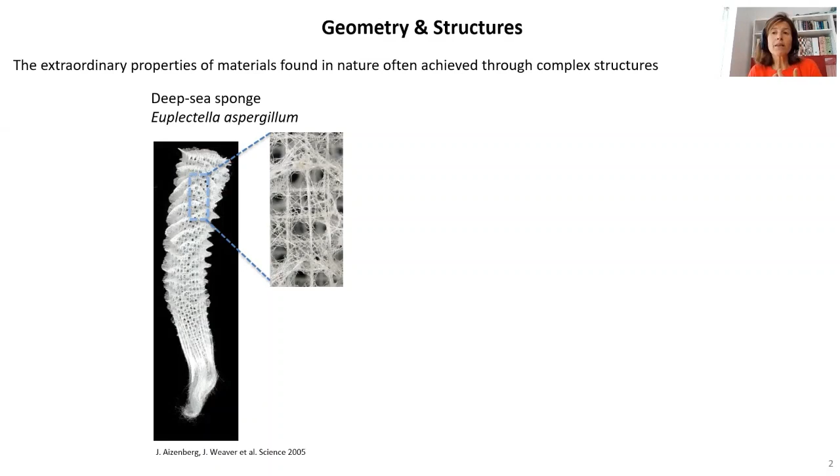For millions of years, nature has used structure to achieve new, unusual, extraordinary properties. Think of the sponge: structures, microstructures, have been demonstrated to provide robustness. Structure has also been used by nature to create colors, as well as to enable adhesion.

But clearly, structures are not only buildings, not only bridges. Structure is everywhere, surrounding us at different scales. An umbrella is an example of a deployable structure, but we have also designed structures to absorb and direct sound.

We use structure for packaging to protect objects, as well as to direct light. And this clearly is a photonic structure that in this case is at the micrometer scale.

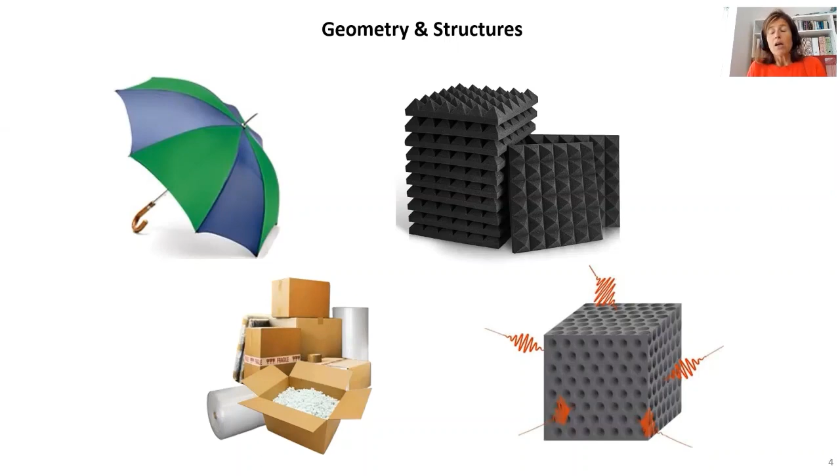In my group, we are very excited about structures. What we do is combine theoretical, experimental, and computational methods to design highly deformable structures, and we try to take advantage of deformation to achieve new modes of functionality. Here you can see some examples.

We have been using instability to design materials with unusual properties, such as negative Poisson ratio, to design energy absorbing materials, as well as actuators. We have also been using origami principles to design reconfigurable structures, as well as bistable mechanisms. We have been studying propagation of mechanical signals through these nonlinear systems.

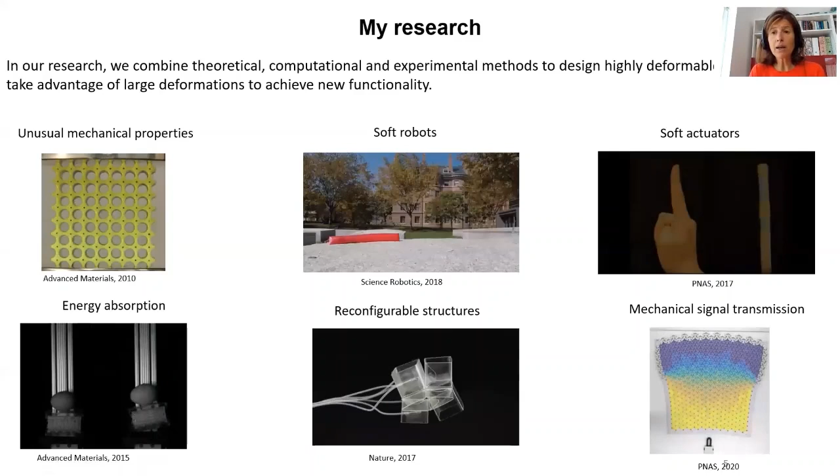Today I want to focus on a special class of structure, and these are multistable structures. The structures I'm going to talk about are elastic structures, made of elastic material.

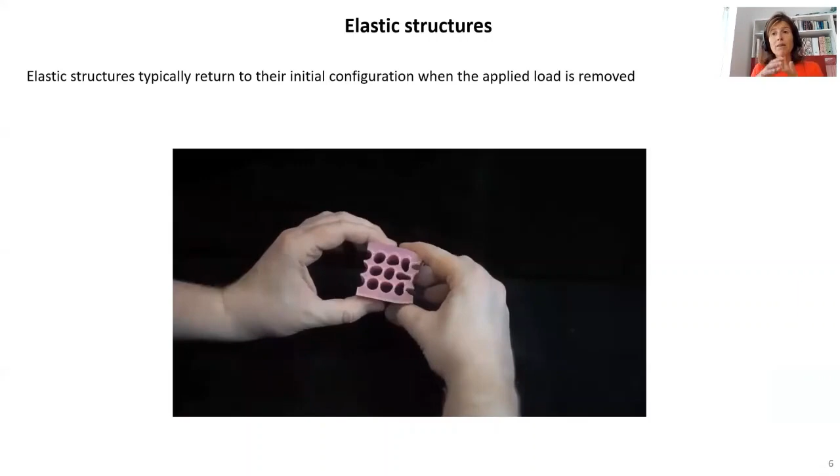Typically when we take an elastic structure, like the one you can see here made of rubber, we compress it, it deforms, it might undergo substantial deformation, but as soon as we release the load, it goes back to the initial configuration. This is because the force displacement curve may be highly nonlinear, but the potential energy, the energy landscape, is characterized by a single minimum.

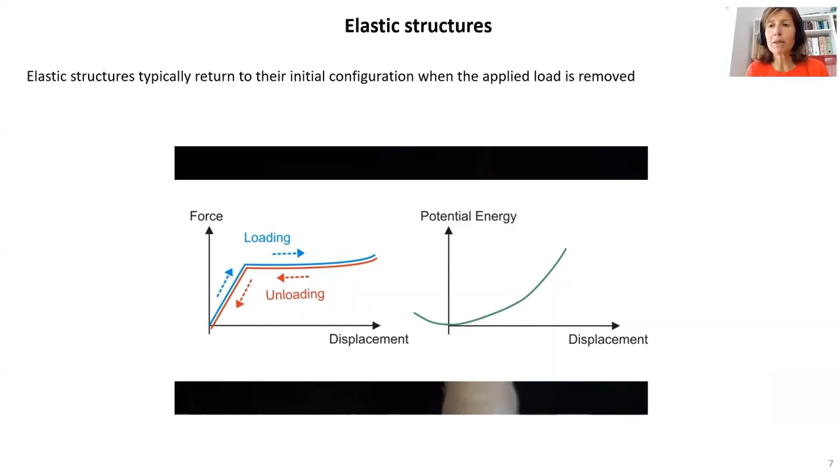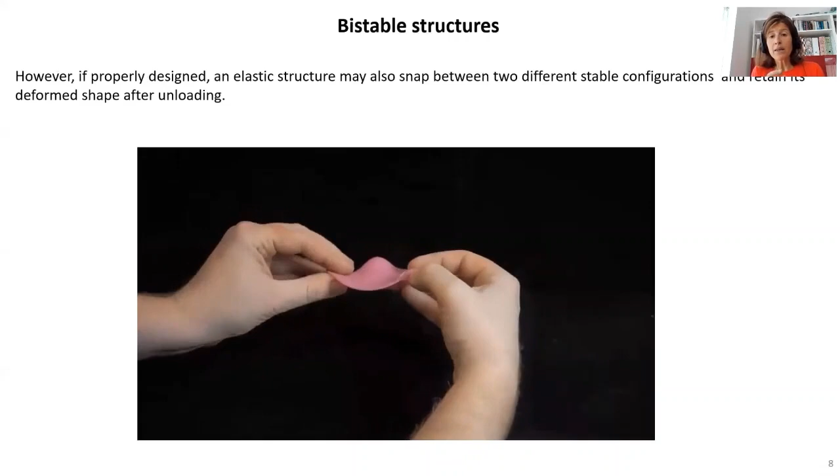However, we also have known for a long time that we can design an elastic structure to have two stable configurations. These are the so-called bistable structures. Here you can see an example: a thin shell given the shape of a dome. Now you can see that we push it down, but as soon as the finger gets away, it doesn't go back to the initial configuration, but it retains its inverted shape.

Why is this? Well, because the energy of the structure is characterized by two minima: one that corresponds to the undeformed configuration, and one that corresponds to a stable deformed configuration. For many years, the mechanics community has studied how to identify and realize shapes leading elastic structures to bistability, to multistability.

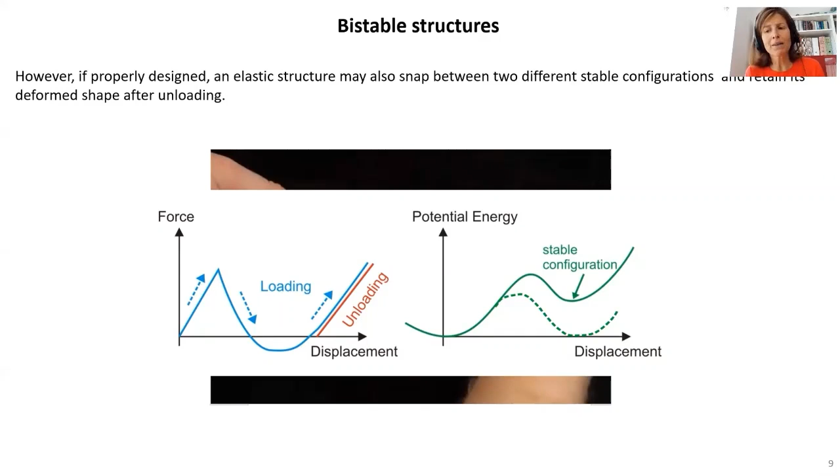But in recent years, a new trend has also emerged. Specifically, multistable structures have emerged as a powerful platform to design, to engineer new functionality and to design smart structures.

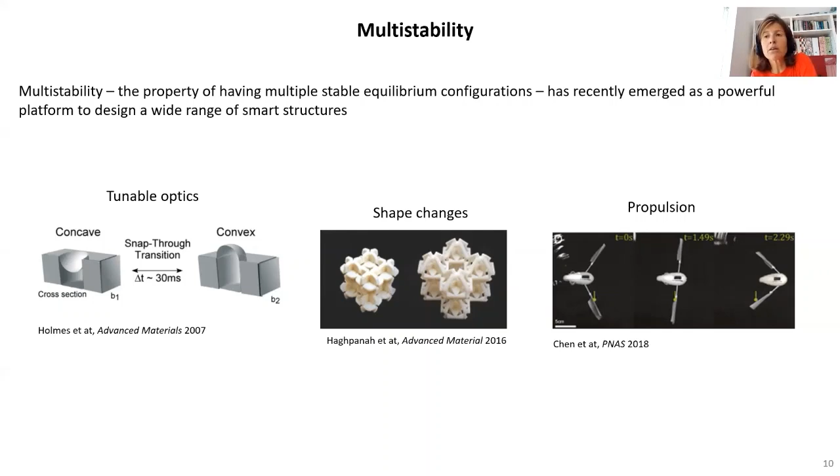My group in recent years has been thinking about these lines. Today, specifically, I want to talk about 2 specific projects.

In the first project, we'll see how bistability can be exploited to design large-scale inflatable origami structures and deployable origami structures. In the second part, instead, we look at the behavior of arrays of bistable structures, and we'll see how these also provide an opportunity for robotic systems.

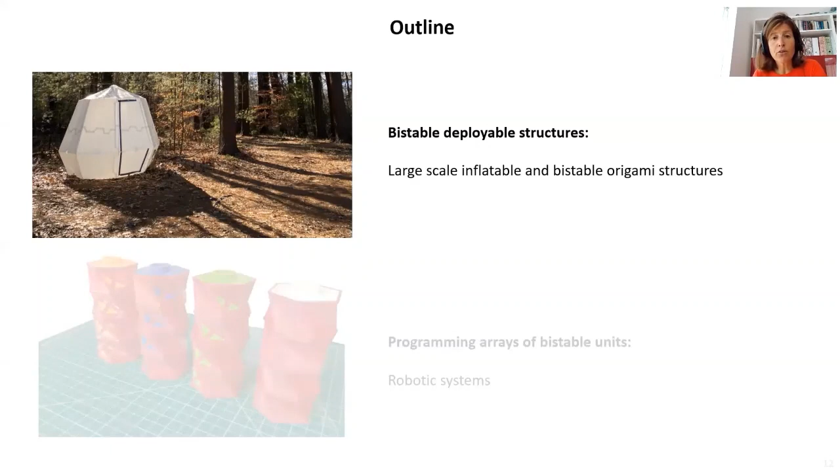All right, so let's start focusing on the first project on bistable deployable structures.

Here, our goal is to design deployable structures. What are deployable structures? These are structures that have a compact state that is ideal for transportation and storage, and an expanded state that is used for functionality. Here you can see an example of a linkage-based deployable dome.

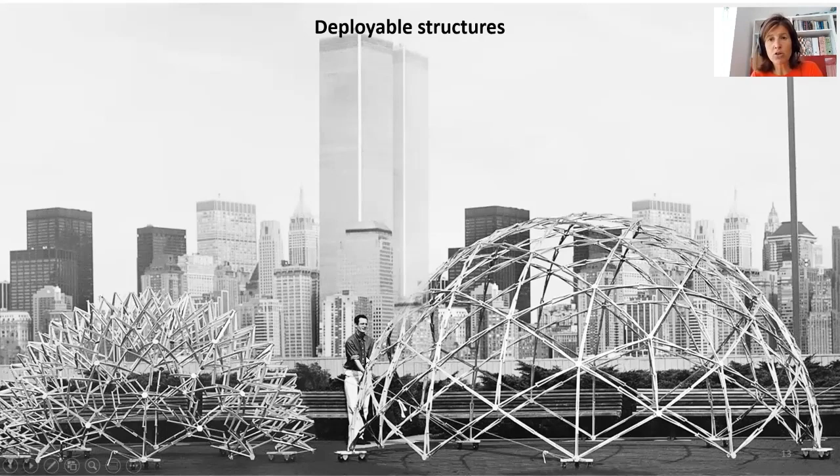The guy here that you can see is Chuck Hoberman, and the project I'm going to present is work in collaboration. It was led by my postdoc Ben, my student David, and it's a collaboration with Chuck Hoberman.

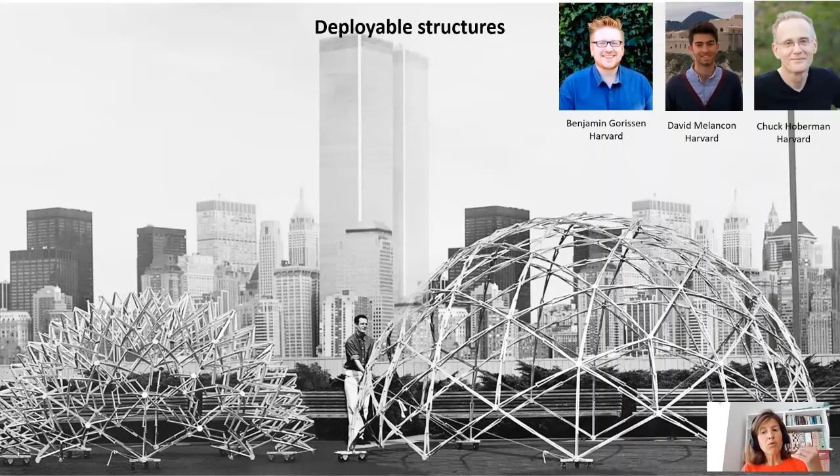Now, if you think about a deployable structure, there are a number of features that we would like them to satisfy. First of all, we want them to occupy the minimum space when they're folded. We want them to provide a robust shell, a protective environment when they are deployed. We want them to lock in place after deployment. We want them to retain the deployed shape. And finally, we want them to be as easy as possible to deploy.

So keeping in mind these requirements, we started looking for solutions that satisfy them. Clearly, there are solutions out there, and one you can see here, for example, linkage-based structures, but they don't satisfy all these requirements. For example, for linkage-based structures, in order to provide a robust shell, you need to have a cover that typically is a separate component that you add on. And further, to lock them in place after deployment, typically you need to add additional components.

So we started thinking about a platform that enables us to satisfy all these requirements. Origami came to our mind as a promising platform. Why is origami promising?

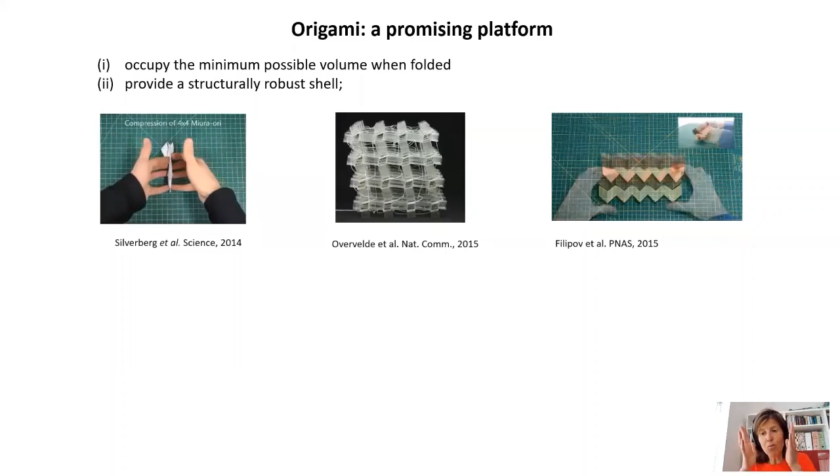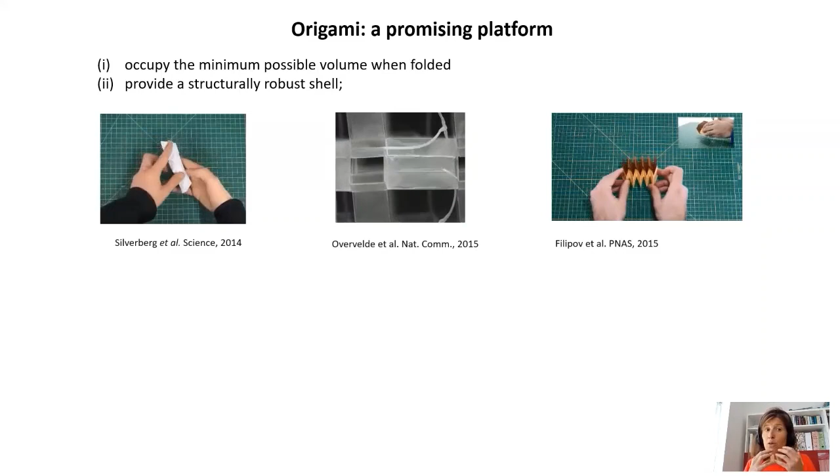Well, first of all, these are structures that can go from a very compact configuration to an expanded configuration, as you can see in these movies playing here.

Second, they naturally provide a robust shell because of integrated faces and hinges. Further, it has been shown that by carefully designing the folding pattern, they can be made bistable, having multiple stable configurations. We envision this feature can be exploited to lock our structure in place after deployment. So all this is good, but how about easy deployment?

The deployment of origami is not typically so easy, as you can see in this movie at the center of the top row. Typically, in order to deploy them, you need to control individual hinges, and this makes the actuation quite a complex process.

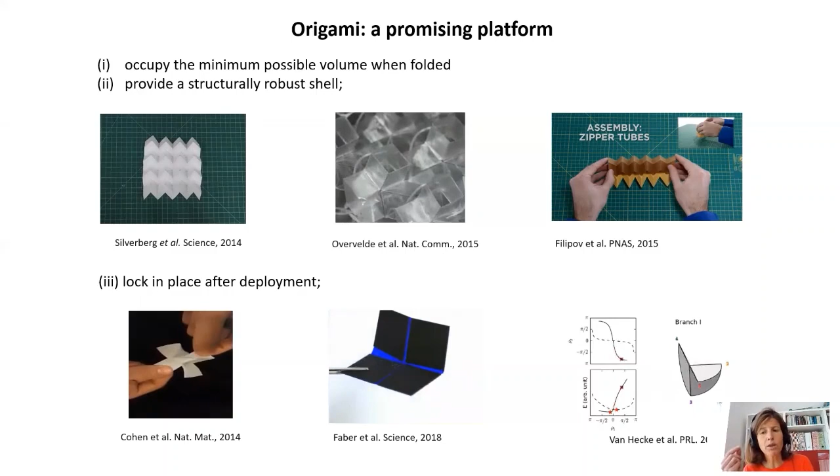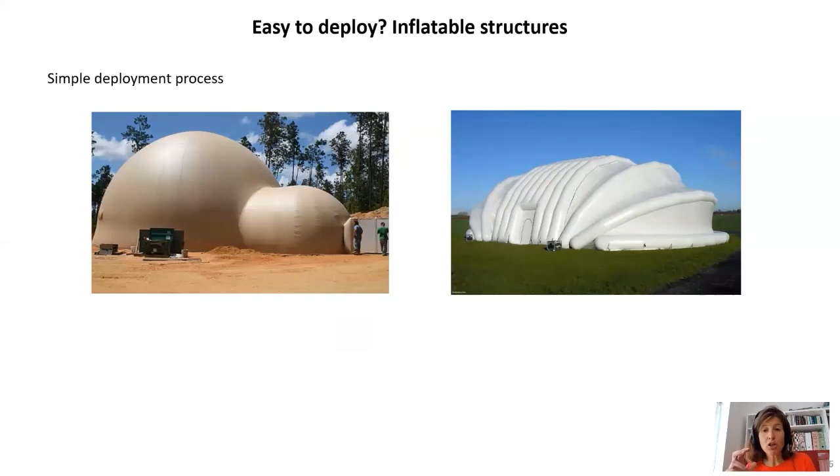To overcome these challenges, we thought about inflatable structures. We use inflatability because inflatable structures are very easy to deploy. All you need to do is provide an input pressure and then automatically they deploy.

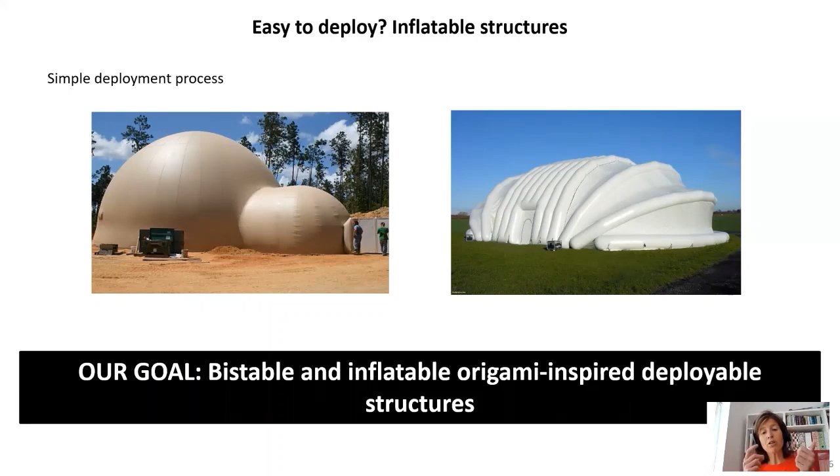So then our question is: can we use origami principles to design deployable structures that are bistable and inflatable?

So what is our platform? Our building block is extremely simple: a triangle ABC, with alpha and beta as the internal angles. To deploy this triangle, we rotate it around the edge BC.

Here is a very simple and important property at the base of our concept. If we choose the internal angle beta to lie within certain limits, at a certain point during deployment vertex A will intersect again the circle circumscribed to the initial flat configuration. Why is this important? This means that the angle alpha is recovering the projected XY plane.

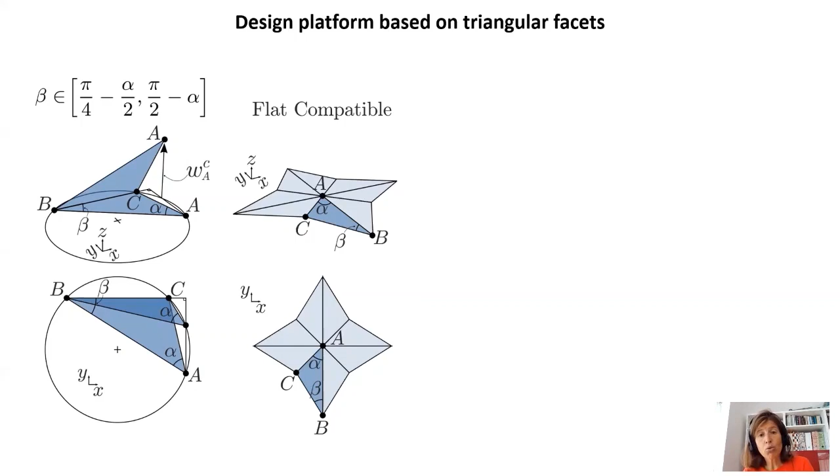Remarkably, this simple property gives us the opportunity to realize closed origami structures with at least two stable configurations. We can take a triangle and tessellate it to form a closed structure. We know that this triangle recovers the angle alpha at a certain point, at a certain level of deployment.

So it means that this structure also has another geometrically compatible state that is expanded—a deploy-compatible state. Now you might ask, what's in between? Well, all configurations in between are going to be geometrically incompatible.

Here the incompatibility is highlighted in red. It means that the faces are either going to separate or compenetrate. We can geometrically quantify this incompatibility, and I denote this geometric incompatibility by delta ABC.

So the idea is these simple geometric properties provide opportunities for bistability. When we make this structure out of elastic material, the flexibility intrinsic to the structure will absorb this geometric incompatibility.

The idea is this structure will have two stable configurations corresponding to the compatible states: the flat compatible and the deploy compatible states. These two states are separated by an energy barrier generated by the deformation caused by this geometric incompatibility.

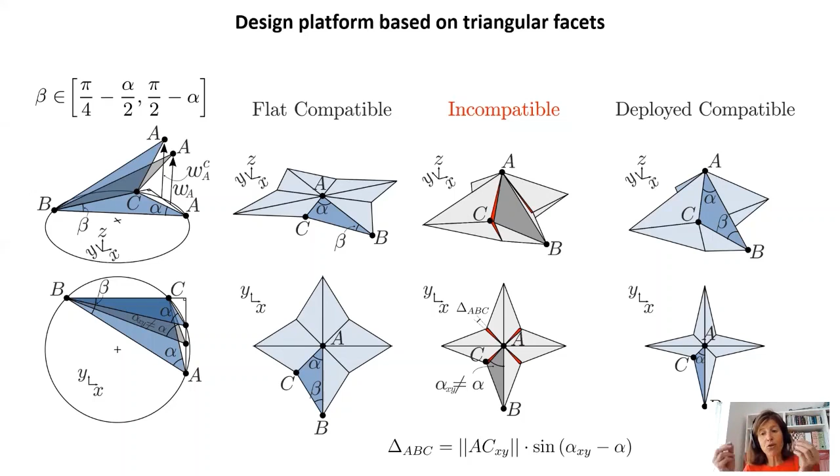Let's learn more about the deployment of a triangle. Here I'm focusing on a triangle with alpha equals 30 degrees and beta equals 33 degrees. I'm reporting the evolution of the incompatibility as a function of the deployment height of vertex A. We see there are two stable states: one clearly the flat state, and one the expanded state at which the incompatibility equals zero.

However, remember our goal is to design bistable structures that are inflatable. So we also look at the volume under the triangle, denoted here as VABC, which we can easily calculate based on simple geometry. Now here I report the evolution of this volume as a function of the deployment height.

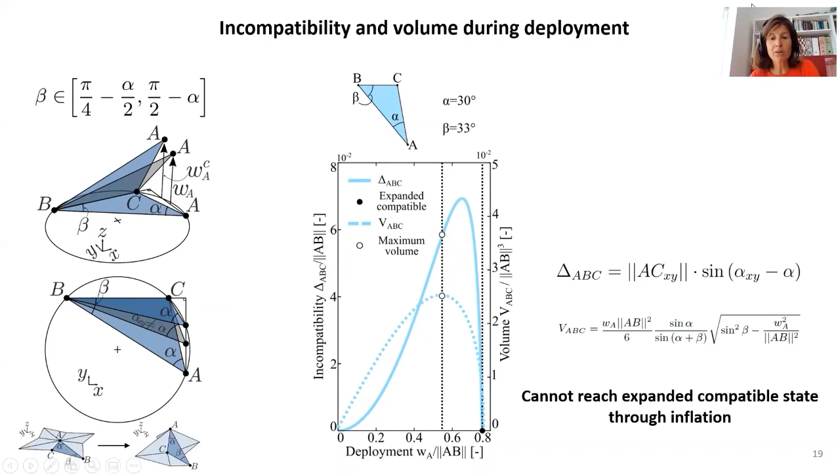But now we see there is a problem. Why? The maximum volume happens before the expanded compatible state. What does this mean? It means that the expanded compatible state cannot be reached through inflation for this specific triangle. Is this a universal property?

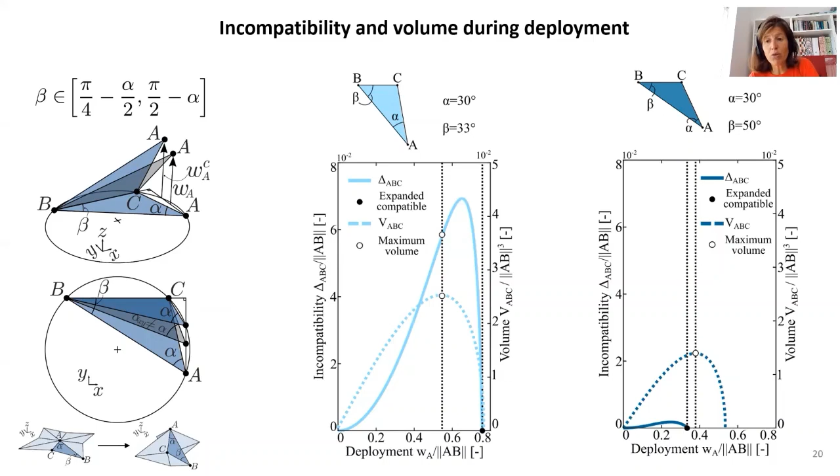Here I'm considering another triangle with alpha 30 degrees and beta 50 degrees. In this case, we see that the state of maximum volume occurs after the expanded compatible state, so the expanded compatible state can be reached by inflation. However, the level of geometric incompatibility is very low, so the idea is such a triangle will give rise to a marginally bistable structure.

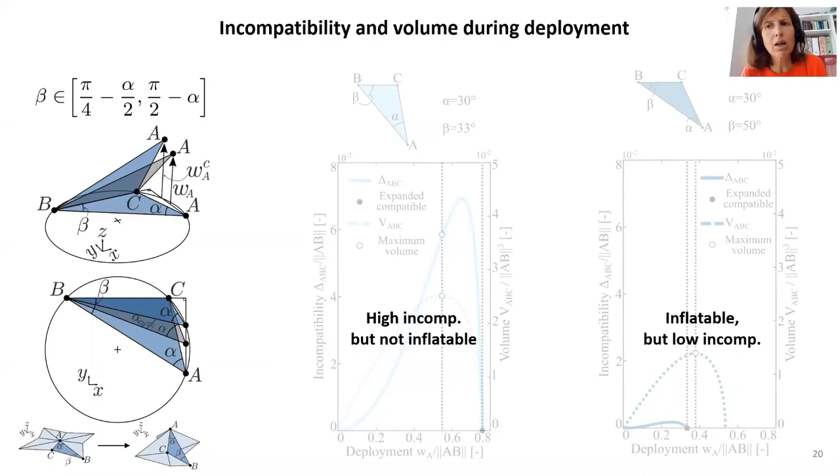So is this universal? What we can do is quickly scan the entire design space, since we have closed expressions to characterize both bistability and volume. What we see is that if we want to realize a structure with large geometric incompatibility, we need to use triangles close to the upper boundaries of the domain. On the other hand, if we want structures that are inflatable, we want triangles close to the lower boundaries of the deployable domain.

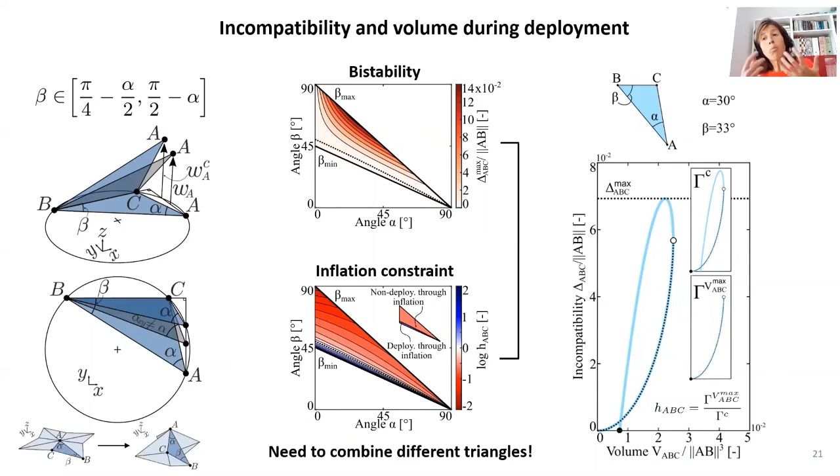So this tells us that if we want to realize structures that are inflatable and bistable, we cannot use a single triangle, but maybe there are opportunities to realize inflatable and bistable structures by combining several triangles. This is what we're going to explore next.

So now the question is: we can focus on the inflatable design with the largest geometric incompatibility, design A. Is this structure going to be bistable? To answer this question, we go to the lab and fabricate the structure.

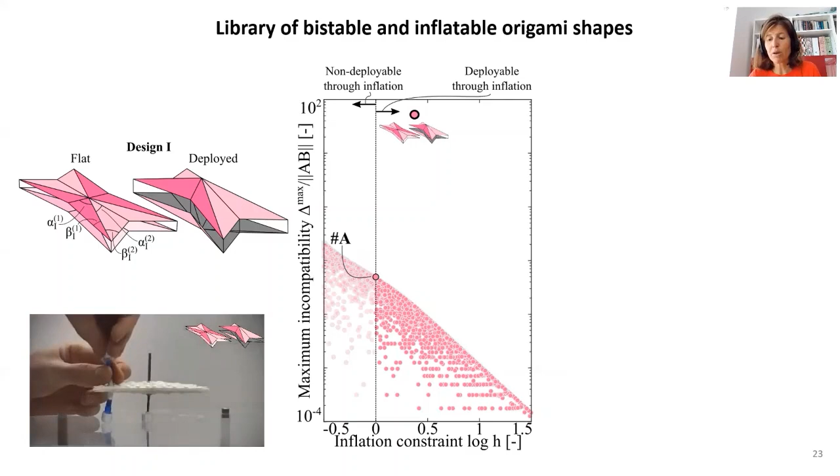We 3D print the faces, and then use a thin plastic sheet to realize the hinges. Now we make sure the structure is airtight, we inflate it, and then we remove the input. What we see is the structure immediately deflates, going back to the initial configuration. At the same time, during our test, we also record the PV curve.

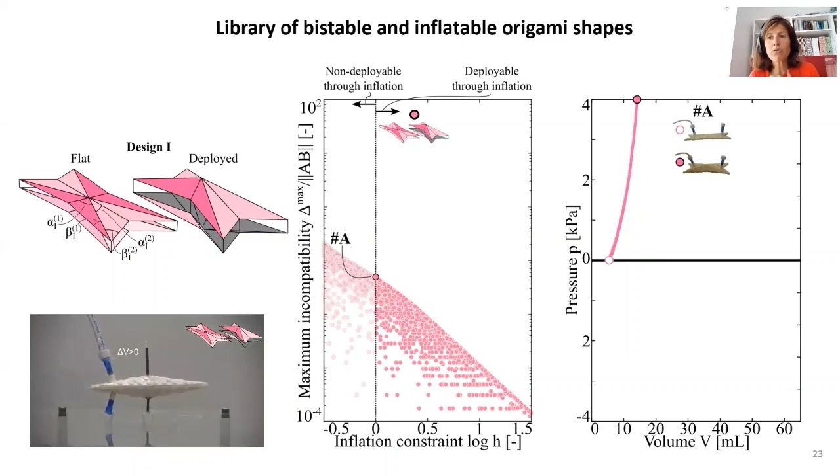We can see that for this specific structure, there is no sign of bistability - we have a monotonic PV curve. So what this tells us is that given our fabrication strategy and the material we use, this level of maximum incompatibility for design A is not enough to guarantee bistability. So what else can we do?

What we can do is still put the triangles next to each other, but instead of connecting the long edge of the triangle to the long edge of the other triangle, we connect the long edge of a triangle to the short edge of the other triangle. When we do that, what we see is that we increase the level of maximum incompatibility.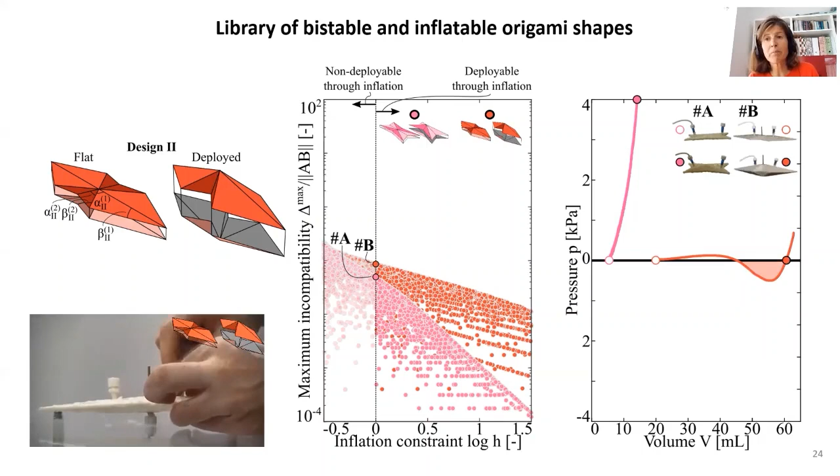David is going to inflate it, and then he's going to remove the input. What we see in this case is that the deployed configuration is retained - the structure doesn't deflate back, even at atmospheric pressure. This bistability is also confirmed by the PV curve, which is non-monotonic and characterized by an area of negative pressure.

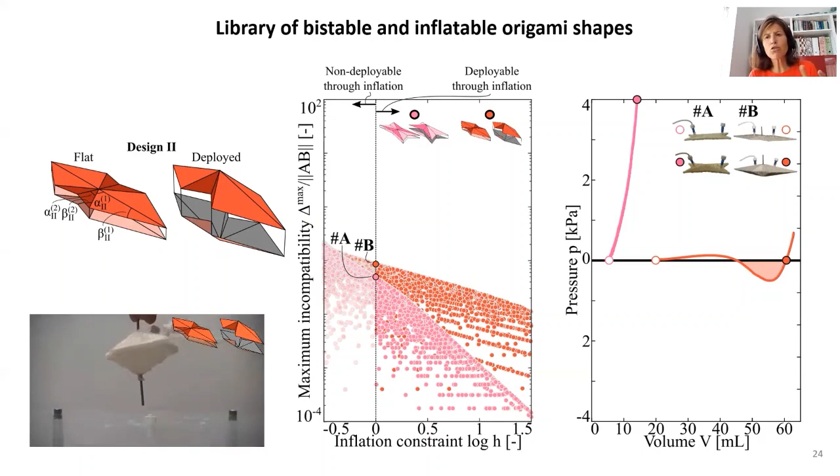At this point, we have a strategy to design bistable and inflatable structures, but we're also limited to this star-like shape. To expand the type of shapes, instead of putting the triangles side to side, we can put the triangles on top of each other. When we do that, we realize this wedge-type structure, and we see that structures are characterized by even higher geometric incompatibility.

So we can go and fabricate one of these designs, specific design C, and we can inflate it. During the inflation, we can measure the pressure.

What we can see, also in this case, is sort of expected: a large region of negative pressure, and we can see that the structure is bistable and retains the expanded shape, even after the input pressure is removed and it reaches atmospheric pressure.

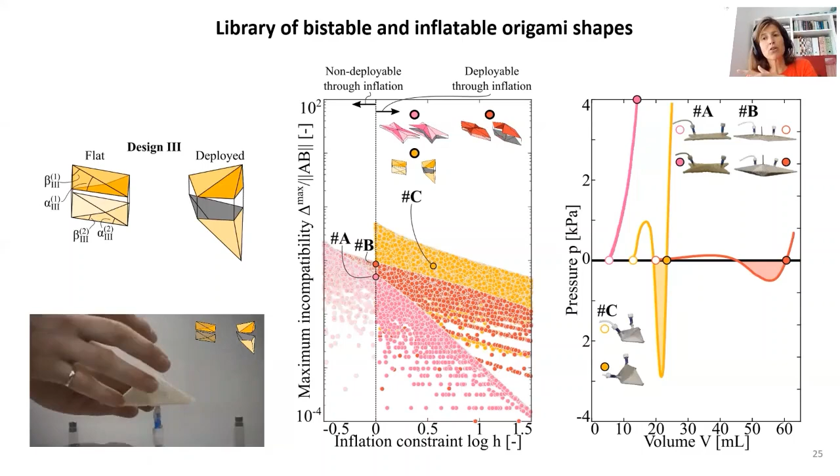So now we have another building block that is inflatable and bistable. So far, all these building blocks start flat and have a flat configuration and an expanded configuration. But what we can also do is realize building blocks that go from one expanded configuration to another expanded configuration. Why is that? Well, we can think of the flat triangle as the projection of an initially rotated triangle.

Interestingly, in this case we have one more degree of freedom in the design: the initial rotation of the triangle. What we can show is that we can realize bistable and inflatable structures using a single triangle, a single building block.

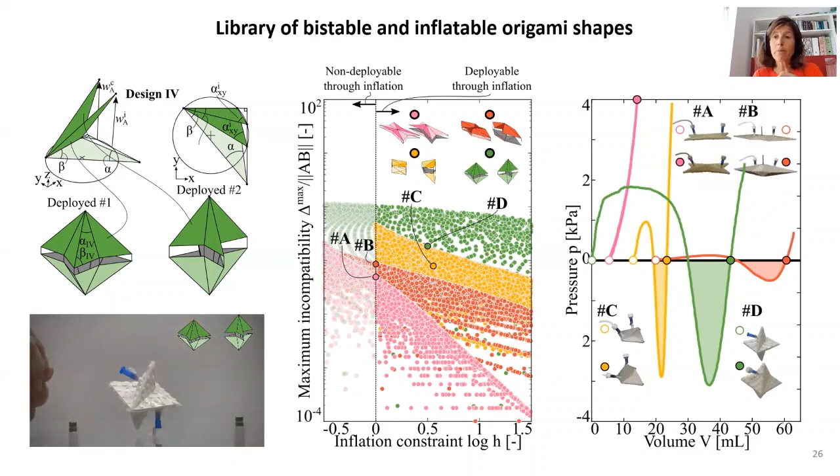What you can see here is that these structures are characterized by large values of maximum geometric incompatibility. So in this case too, we can fabricate the structure at the centimeter scale, test it, and inflate it.

What we see is that they are largely bistable, and the PV curves are characterized by a region of negative pressure. At this point, we have identified 4 different designs comprising 2 different types of triangles, and we have seen that 3 of them can be bistable and inflatable at the same time.

At the beginning I was promising you a functional, bistable, deployable structure, right? Clearly we cannot see that yet. But what we can do now is think of these designs as building blocks to realize functional structures. For example, we can focus on design 3, this wedge-type structure, and by combining two of such designs, we can think of realizing an inflatable arch.

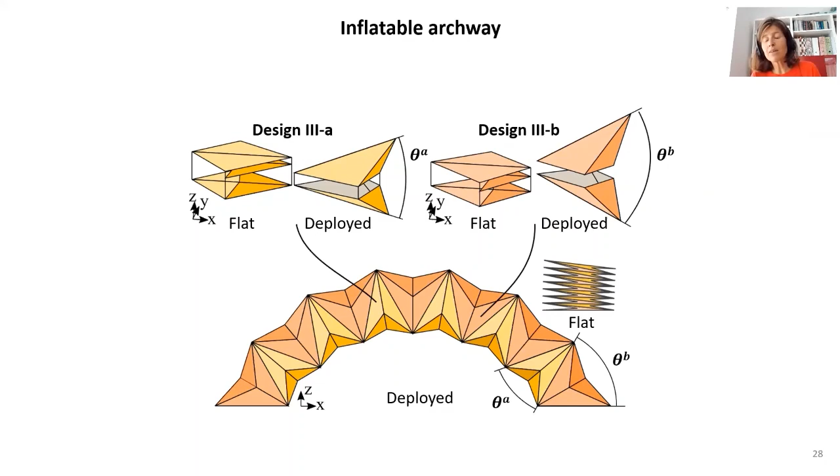So here is our prototype and experiment. This structure is slightly larger, at the meter scale, and is realized out of corrugated plastic. Now you see we have inflated the structure, we have deployed our arch, and now we are removing the input pressure, so soon the inner cavity will be at atmospheric pressure. But what we see is that the structure remains in the expanded configuration. This confirms the bistability.

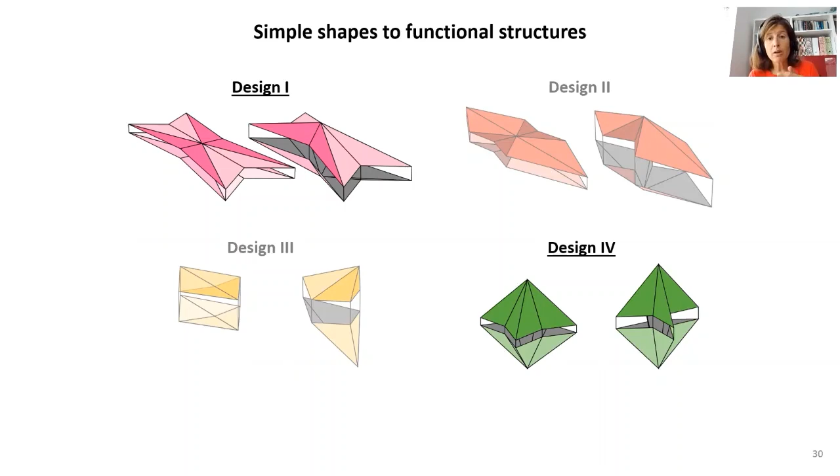So what else can we do? We can also combine layers of different designs to realize functional systems. For example, we can use a layer of design 1 and a layer of design 4 to realize a tent, a shelter. The layer of design 1 will define the floor, and the layer of design 4 will define the livable space. In the prototype we built, to improve the livable space, we also used trimming operations.

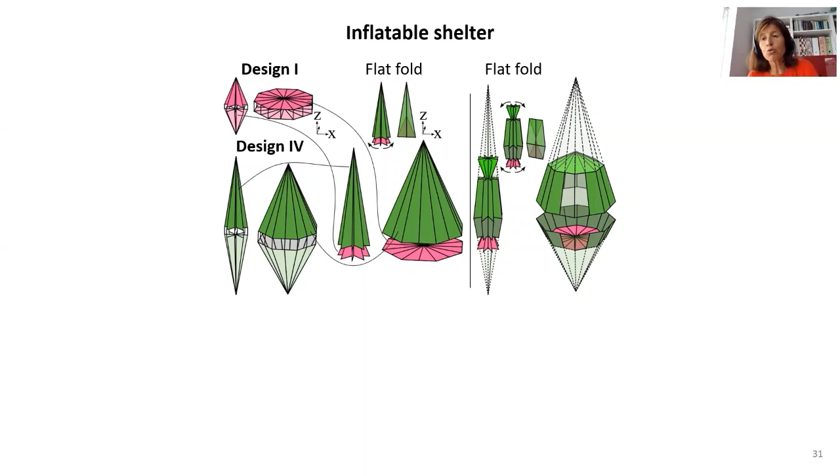We use 3 different layers of design 4, but this doesn't change the working principle—it's purely for aesthetic reasons. What we envision is a structure that is initially flat, then we provide pressure and it deploys. Importantly, when we open the door and bring the internal environment to atmospheric pressure, we're still able to retain its deployed state. So here you can see David and Ben with our prototype.

So it's flat. Now what they are doing is connecting the pressure source. We are pressurizing the structure, and we see that it's deploying. Now the roof is deployed, and now David goes in and opens the door. Now the structure is at atmospheric pressure, but it doesn't collapse, and this is because of its bistability.

Now, when we are done using the structure, we can simply connect it to vacuum, so we can bring it back to the flat state and we can move it. So here is pretty much where we are with this project, with the design of deployable, inflatable, and bistable structures.

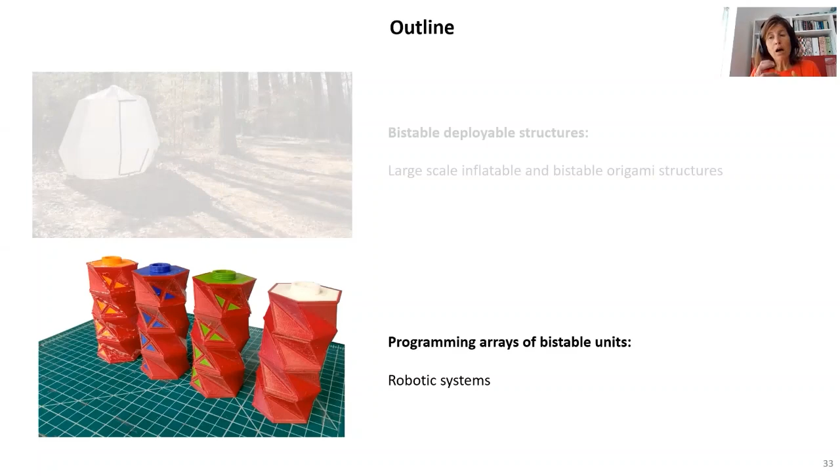In the second part of this talk, I want to still focus on bistable origami structures, but this time I want to focus on arrays of bistable structures, and we'll discuss how we can program such arrays to realize simple robotic systems.

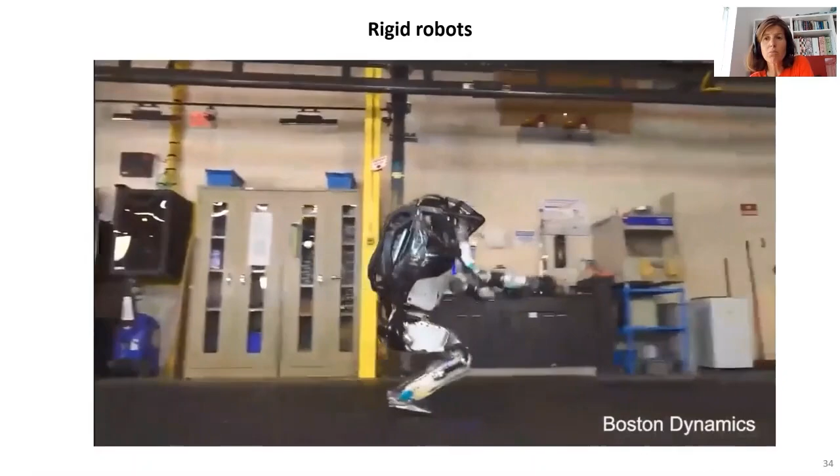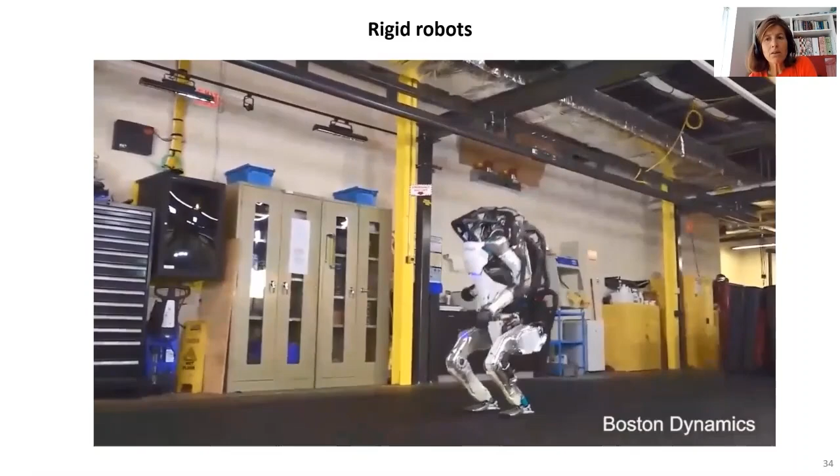So what you see here is a robot designed and realized at Boston Dynamics. You can see these robots are incredible—they jump, they can run, they can do all sorts of crazy movements. But clearly these machines are also extremely complex and extremely expensive. And the complexity of this traditional rigid robot has motivated, in recent years, the search for inexpensive and simple machines that are still capable of locomotion.

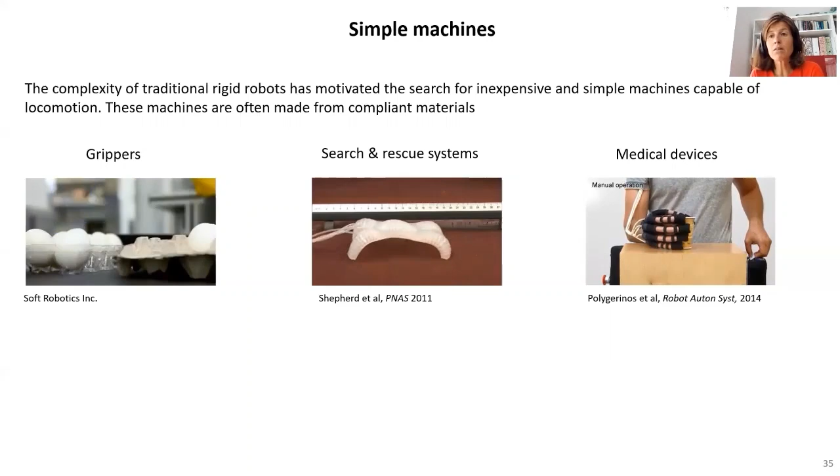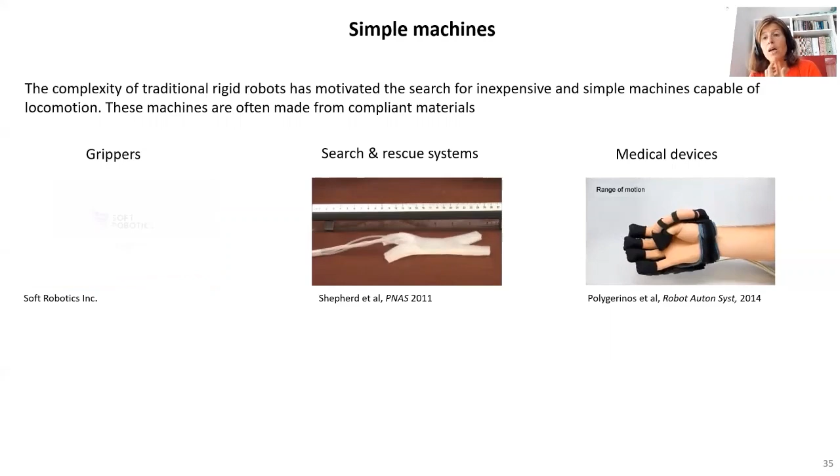Typically these machines are made of compliant materials such as rubber, and here you can see three examples. These simple machines are able to grip objects, they can move, and since they are made of compliant, soft material, they're also good for interacting with humans—for example, they've also been exploited to realize medical devices. However, although lot of progress has been done in the past few years, there are still challenges that remain.

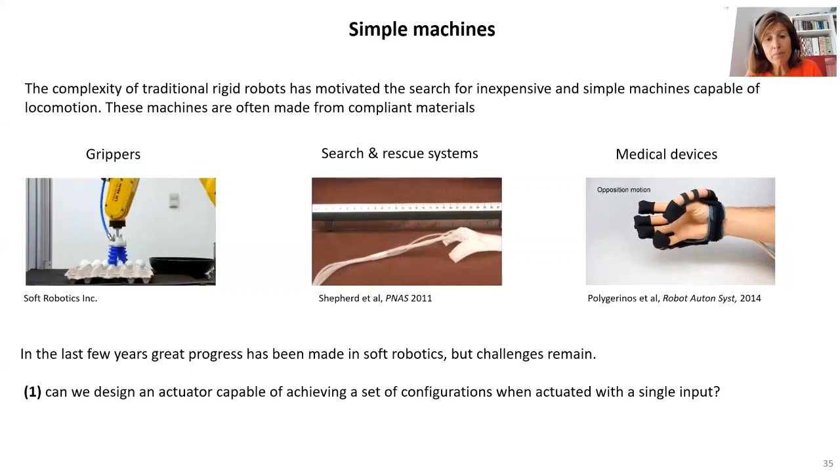For example, if we have a gripper, this gripper can only bend. We design an actuator, and this actuator is only able to achieve one configuration, to deform according to one configuration.

So the question we can ask is, can we design an actuator that can achieve a different set of configurations, that can bend but also twist when actuated with a single input? Depending on the level of input, it can achieve different deformation.

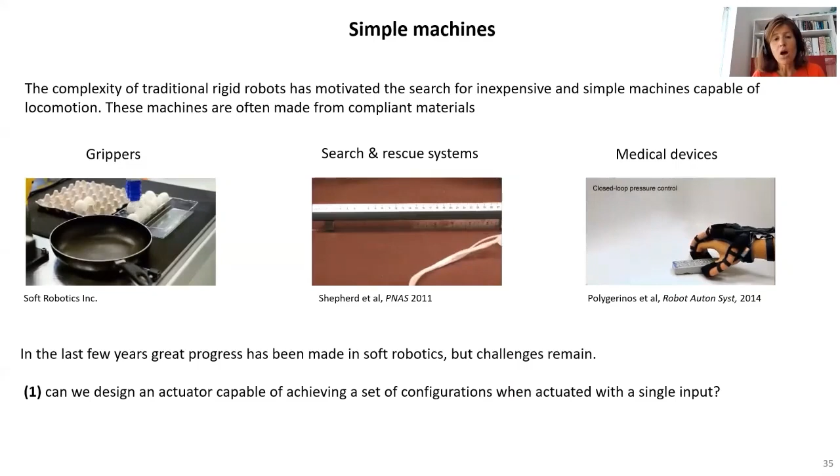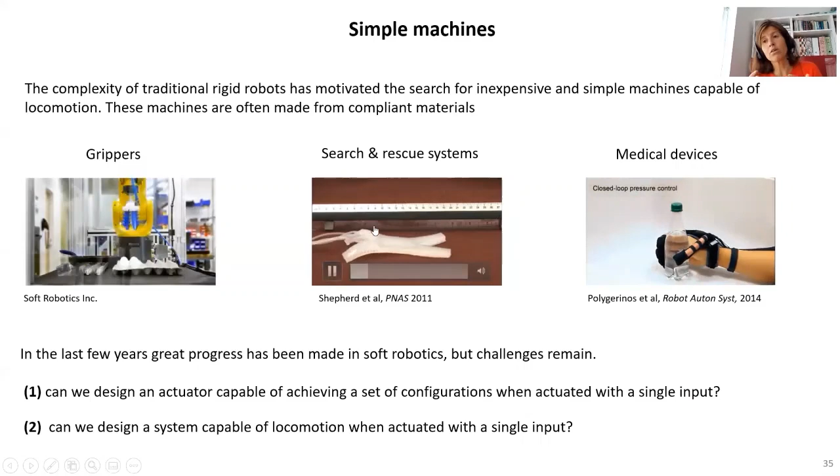Or can we also design a system that is able to move when actuated with a single input? As you can see in the movie, in order to achieve locomotion here, there are many tubes coming in. Why is that? Because in this simple robot, there are 5 actuators, and they need to be actuated independently according to a specific sequence in order to achieve locomotion.

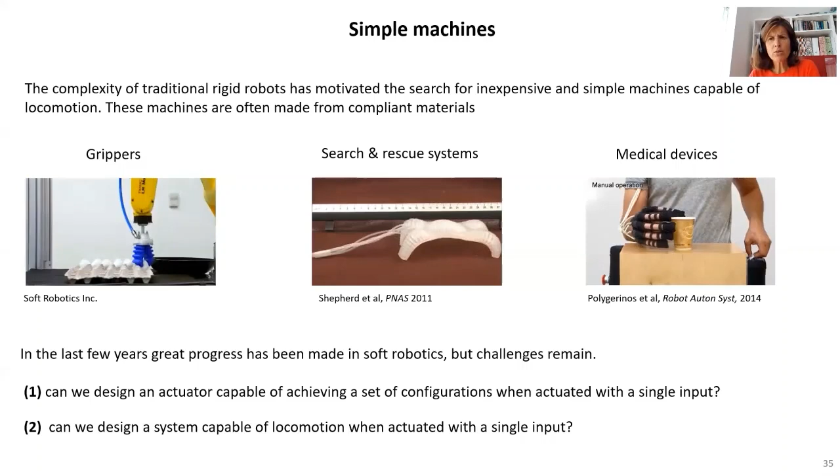So to address some of these questions, we have recently explored a simple origami platform. Specifically, we have focused on an origami module based on the Kresling pattern, and again we have been using inflation as our stimulus. Here you can see our simple basic Kresling pattern is not bistable.

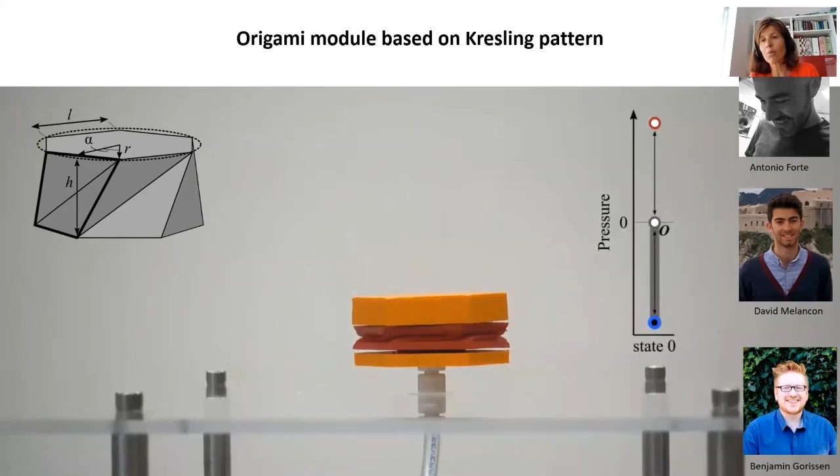This pattern can also be designed to be bistable, but we chose a geometric parameter so that the system is monostable. So you see we pressurize, it twists and expands, and then we vacuum it. It's basically inflate, deflate, and go back to the initial flat configuration.

So in order to achieve functionality here, we explore bistability as a platform. To make our building block bistable, we divide one of the panels into 4 triangles to form a 4-type vertex. Here you can see one of our bistable unit cells.

You see, when we inflate, our bistable panel pops out, and the panel remains out. This breaks the rotational symmetry and basically introduces bending. Then, when we further vacuum it, the bistable panel pops back in, and the structure goes back to the flat state.

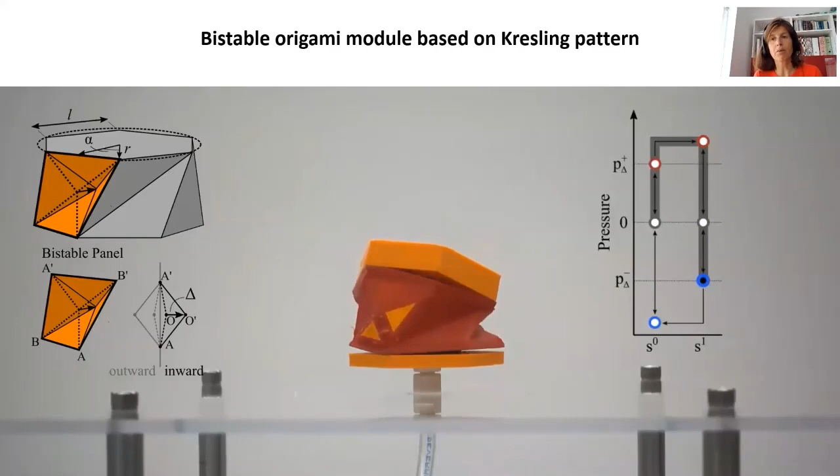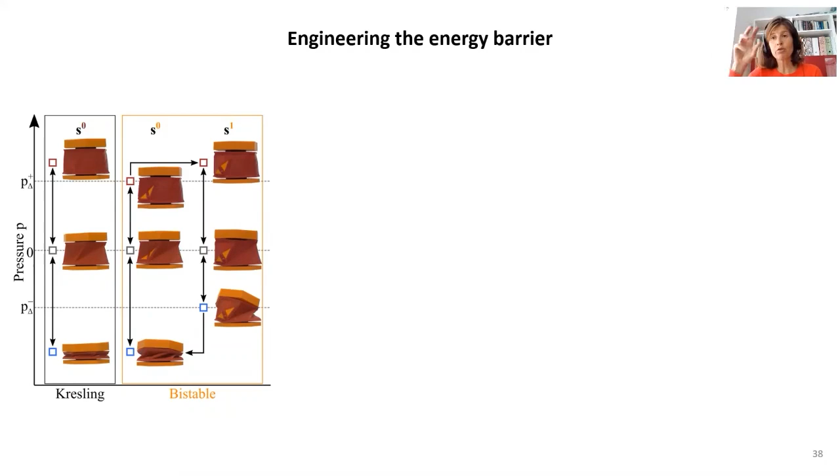So here is our monostable simple Kresling unit. Here is the state diagram for our bistable structure, where you see if we inflate large enough, we can pop up the panel, and then when we deflate, we can achieve some bending as we break the rotational symmetry.

An important point here: we can control the pressure at which the bistable panel pops out and pops back in by controlling the position of the central vertex. We denote this position with delta, and we see that by increasing delta, we can increase the pressure required to snap the bistable panel, both when inflating and for the vacuum threshold. As for the maximum bending angle we reach, this is insensitive to delta, because it's determined by the contact between the rigid plates.

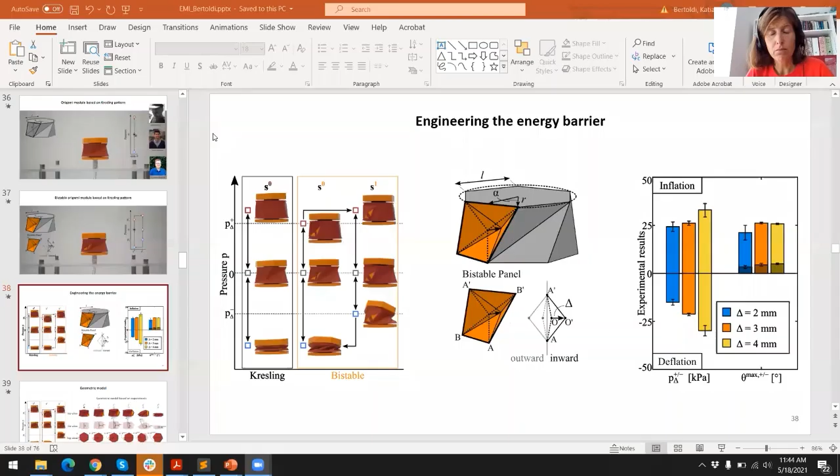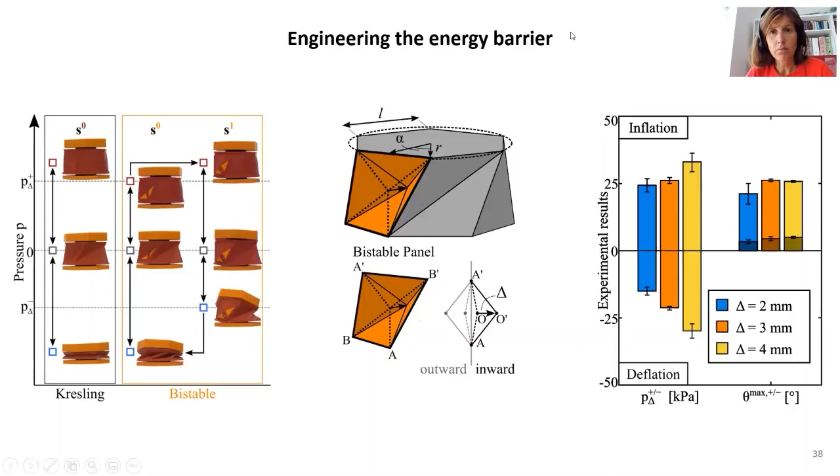Okay, so now we have a strategy to design a bistable Kresling unit.

So what we can do during our experiment, we can also measure the bending, the twist, and the displacement for the different building blocks with different levels of delta. We can use this measurement as a base for a very simple geometric model that we can use to predict the behavior of stacks of such modules.

Now when we stack this unit, the parameters we can play with are the delta for the different units, but also the orientation of the unit, the chirality, as well as the position of the bistable panel on these units. To test our method, we focus on a simple two-unit structure.

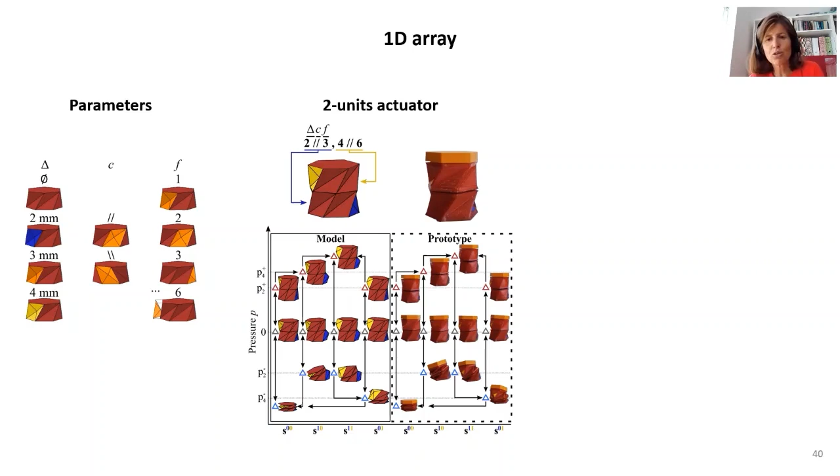So now our goal is to use these stacks of units as a base to realize simple robots. We are particularly interested in the deformation that this structure can achieve.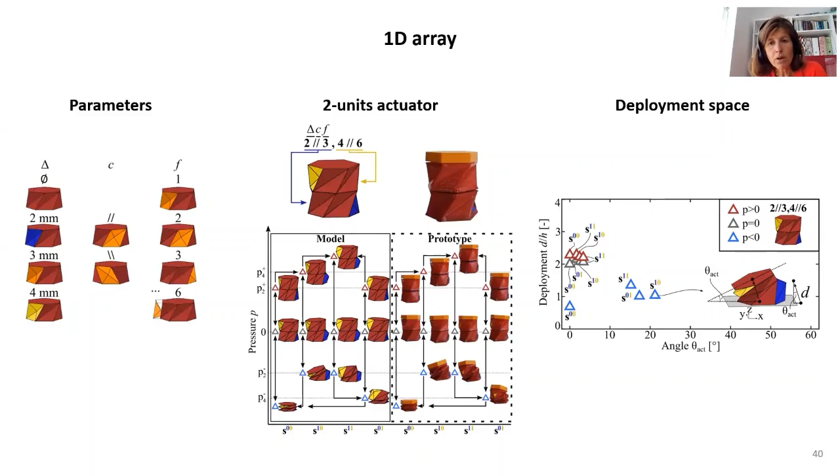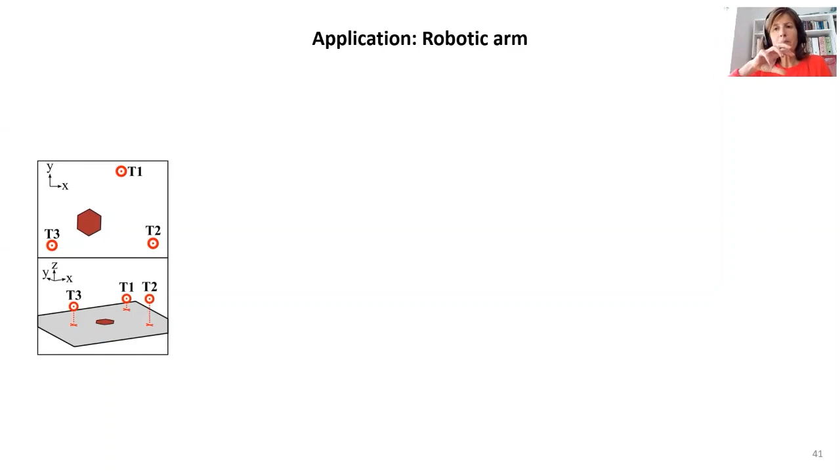Next, we can combine this with a very simple optimization algorithm to design an array of building blocks capable of, for example, reaching 3 specific targets, which I denote here T1, T2, and T3. To identify the design leading to an actuator capable of reaching these 3 targets, we combine our simple geometric model with a simple optimization strategy.

Here we use a greedy algorithm, and this algorithm enables us to identify the optimal configuration. Specifically, it tells us that if we want to design an actuator that gets very close to these 3 targets, it's best to stack together 12 units, and it gives us the specifics of each of the units. Here is the state diagram for such an actuator.

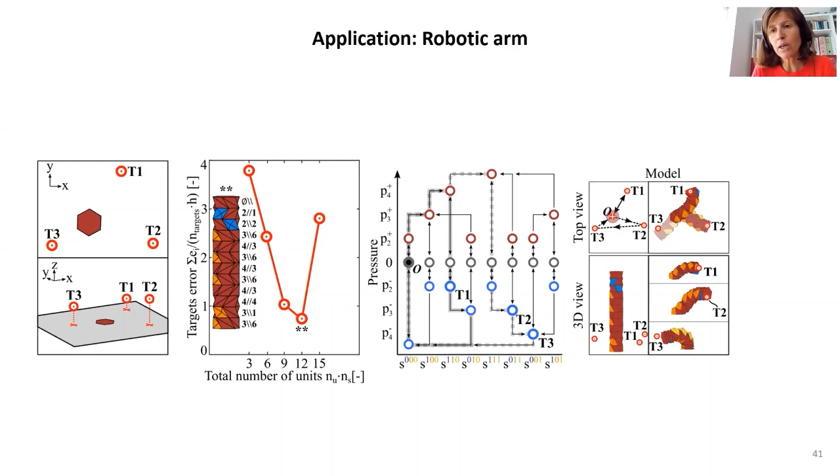What we see is first we need to inflate it up to P4, and then when we deflate it, we can reach the first target. Then, if we want to move to the second target, we need to reset the system, pressurize it a bit further, and then vacuum it. In this case, we reach first T2 and then T3. So that's the prediction of the model. Let's see how it works in practice.

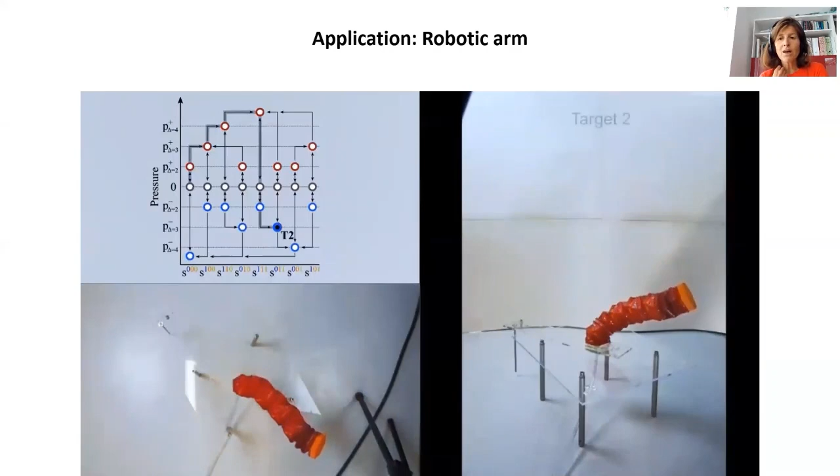Here is our robotic arm. Now we are pressurizing, so some of the panels pop up, and now we are depressurizing and we reach T1. At this point, we are resetting the system, so the actuator goes back to the initial configuration, and now we pressurize it further. When we vacuum it now, we can reach T2 and subsequently target 3. Then we reset it and go back to the initial configuration.

So in this case, we have been able to realize a system that can achieve 3 specific deformed configurations at 3 different levels of applied input. However, for this case, in order to achieve the 3 targets, we need to reset the actuator in between, and this is not always convenient.

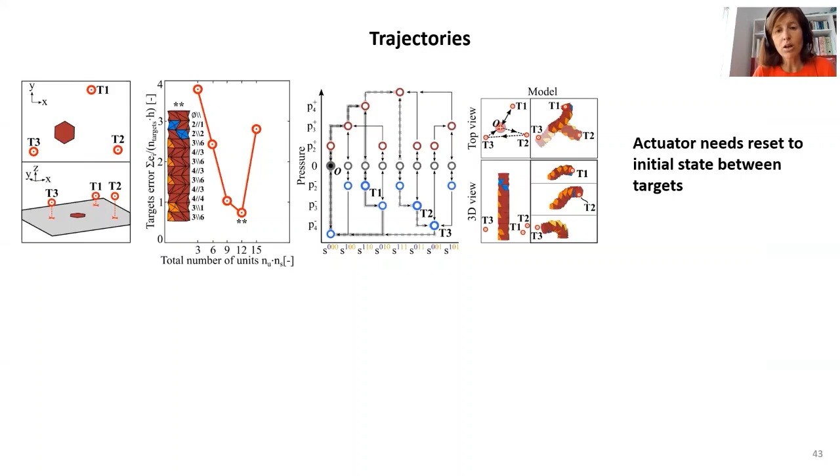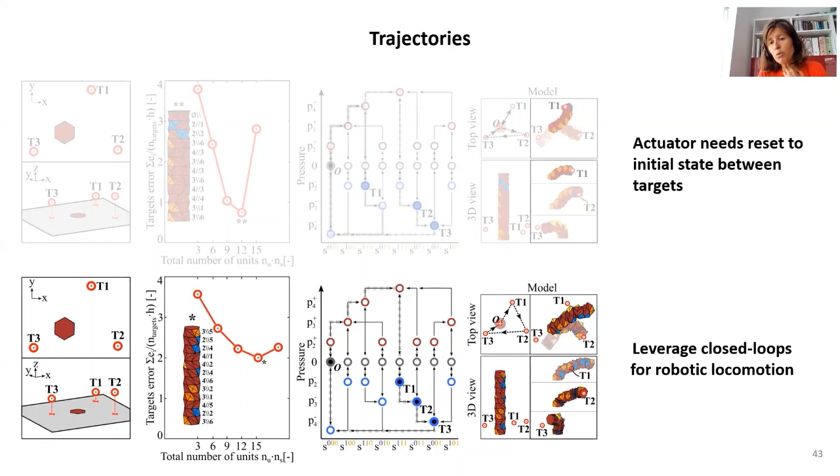If you think about locomotion, we want to have a loop, a trajectory. So we can also add additional constraints into our optimization algorithm to require that there is no reset in between the targets. When we impose that, we get a different optimal configuration, and this provides opportunities for closed loop systems that, for example, can be used for robotic locomotion.

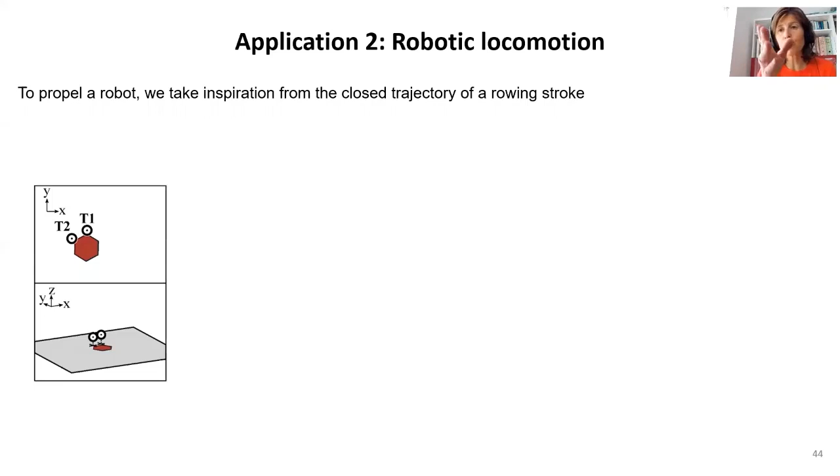Just to demonstrate the concept, our goal now is to realize a simple robot that can propel itself. For this, we take inspiration from the closed trajectory of a rowing stroke. Here are the 2 targets that we want our actuator to reach: first T1, straight, then T2. Again we use our optimization algorithm, and in this case we found that an actuator with 3 units is best to move between these 2 targets.

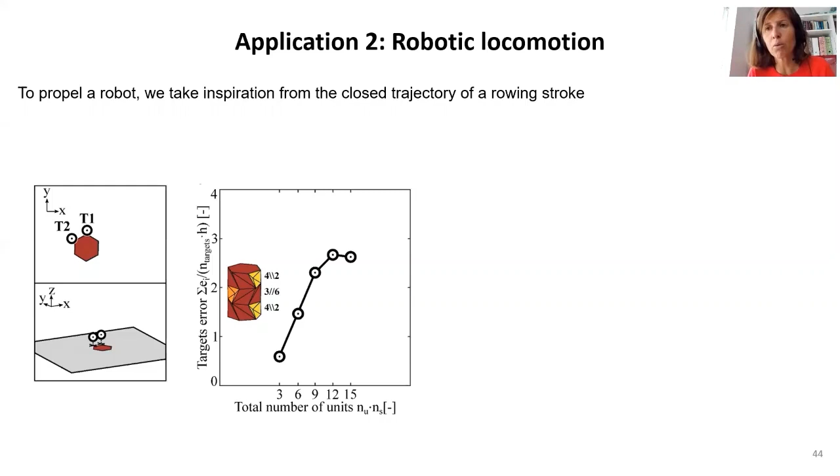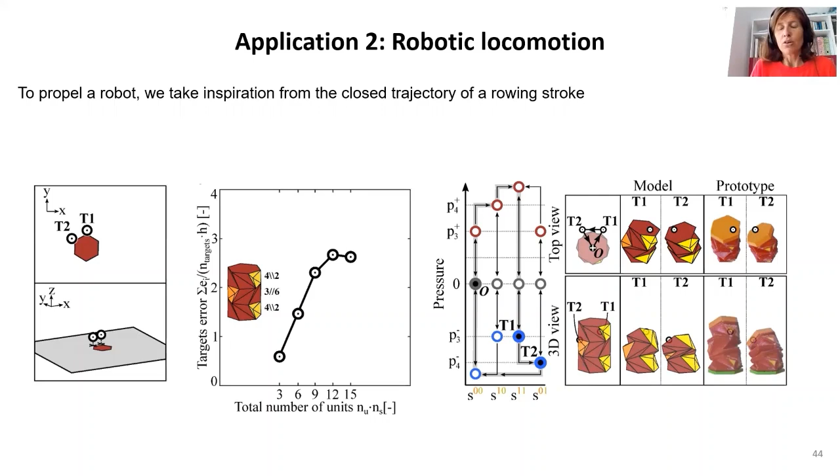So now we have the actuator. How do we go from this actuator to a robot? We mount 2 of these actuators to a chassis, and we attach to the actuator also 2 rigid rods that act as amplifiers, enabling the actuator to touch ground and propel itself. So when we reach T1, the rigid arm, the amplifier, will touch ground, and then when we move from T1 to T2, it will take off. This will propel our robot.

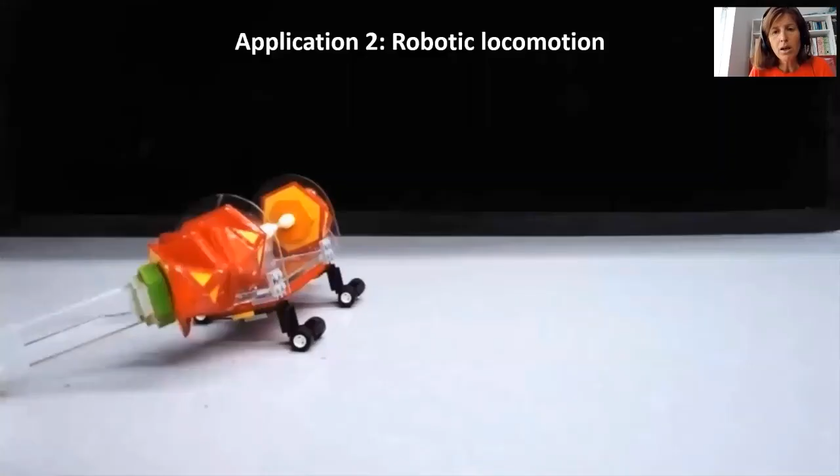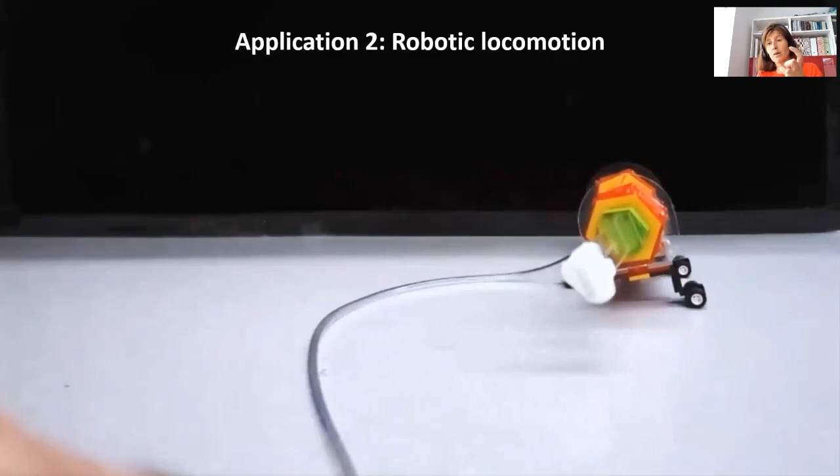Here is a movie of our simple robot in action. What we are providing is a single input pressure, so we are pressurizing and depressurizing the actuator. We see that over each cycle, the robot propels itself, moves a bit toward the left, and so cycle by cycle, it keeps moving.